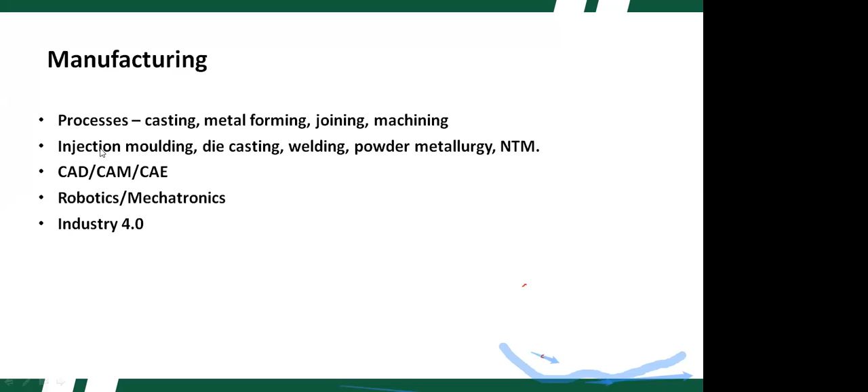Now, Industry 4.0 is the umbrella. It covers all the mentioned terminology. So basically, at the level of Industry 4.0, it is the communication between the elements, such as the robotic arms, through the framework of IoT, that is the Internet of Things. So this is the brief overview of the manufacturing setup, which of course includes the traditional processes and also some of the modern elements.

Okay, now we specifically come to additive manufacturing. We define it. It is popularly called 3D printing, and also a formalized term for rapid prototyping. Rapid prototyping we will be covering later, but as the name suggests, some prototype has to be produced quickly.

Now again, as I have told, at the core lies a 3D CAD system. So first we need to generate a model using a 3D CAD system, and then it can be fabricated. So the parts are made by adding material in layers. This is interesting here, that each layer is a thin cross section of the part derived from the original CAD data. So that also we will discuss, how it will be.

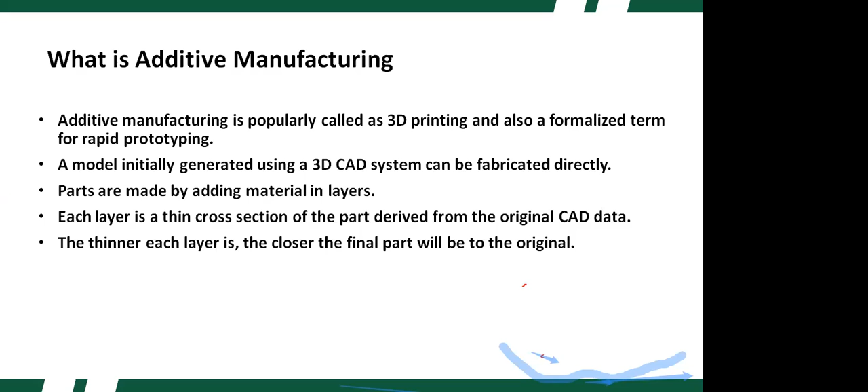The thinner each layer is, the closer the final part will be to the original. So here I would like to present an analogy that the layer by layer manufacturing, or additive manufacturing, in some way is similar to the medical imaging of the CT scan, but it is just the other way around. So that we will cover a little bit in the scanning part.

Okay, so basically the native file format to additive manufacturing is the STL format, the abbreviation of stereolithography. And originally it was created by 3D Systems of the US. Now, as mechanical or automobile engineers, we have been working with CAD. And if you are a little bit familiar with computer graphics, we know that in the back end of a CAD package there are certain algorithms going on, like the line drawing algorithms and so on. Similarly, there are various CAD model formats as well. So STL is just one of them.

So it can be called standard triangle language, or standard tessellation language. And this is a standard file format supported by many software packages used for rapid prototyping, 3D printing, and computer-aided manufacturing also. An STL file basically describes the surface geometry of a 3D object, and it does not take into account the representation of color, texture, or other common CAD model attributes. So just the surface geometry. And we can use ASCII and binary representations. Binary files are more common because these are more compact files.

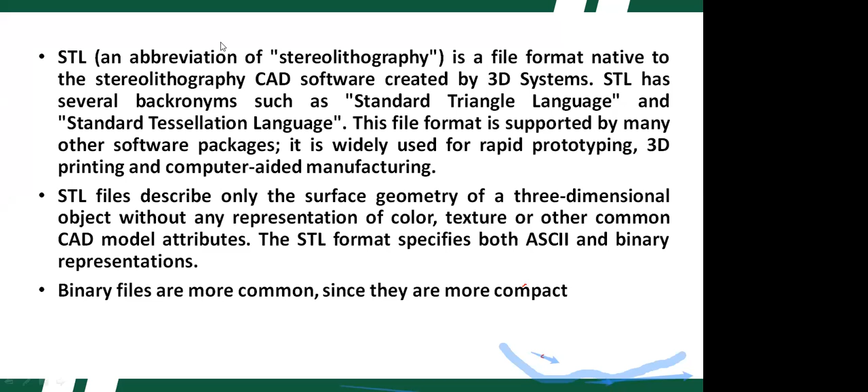So this is a typical representation where we have the original CAD model. As I have told you, for better understanding of the CAD model, one needs to have a knowledge of computer graphics, how the graphics entities are created with the help of computer graphics. So there are various algorithms and various procedures, and the STL model is basically created from this CAD model of this cylinder by using these triangulation elements.

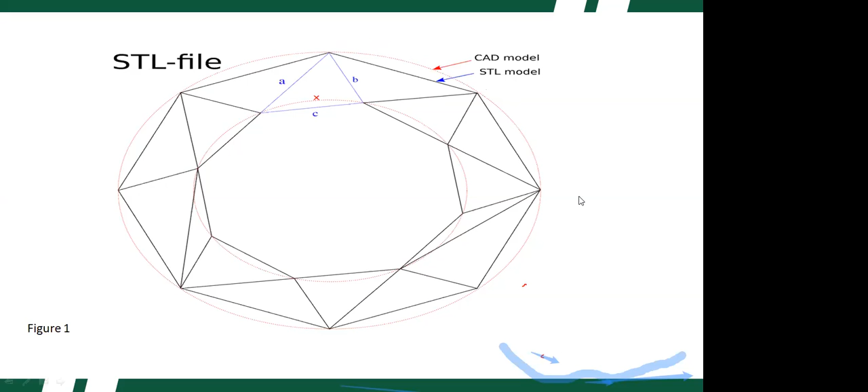Okay, and one more thing. Of course, when we talk about additive manufacturing as such, the better knowledge of this subject is with the industry people who have been supplying the equipment and working on various projects. So as an academician, I'm largely following a textbook style, so that the faculty members and the students have a better idea or overview. Then of course, when they start doing the actual work in collaboration with the industry, they can go further, more technical.

For example, there are various issues. In the polymer domain, there are various machines. Some machines cost maybe just rupees 1 lakh to 3 lakh, like, for example, MakerBot in the range of 2 to 3 lakh, but there are Stratasys machines maybe costing rupees 30 lakhs. So the faculty member might have some funded project where the money is available. But still the question is what kind of equipment you will require. That you can answer only when you have at least a good academic exposure to the subject.

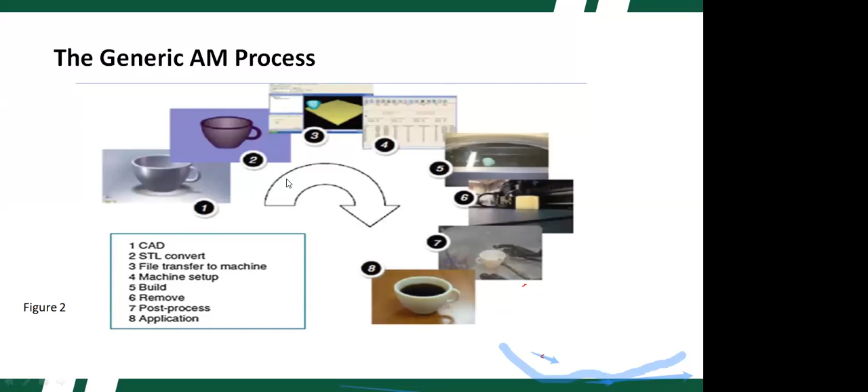Okay, so we will commonly encounter certain processes like stereolithography. So this is an old process, again used to create certain 3D models by specific machinery, originated by US company 3D Systems. They use the term stereolithography. Then the 3D printing term was actually used by the researchers at MIT. So they invented an inkjet printing based technology.

Because if we talk about our normal inkjet or laser printers, they are basically doing the same thing in a 2D domain. So we have a piece of paper which is a plane, and there is a reservoir of the liquid ink or the powder, whatever it is, and it is coming in the required quantity, and the print head basically moves onto the paper. So the only thing is that in 3D printing, we are extending a 2D process into the third dimension.

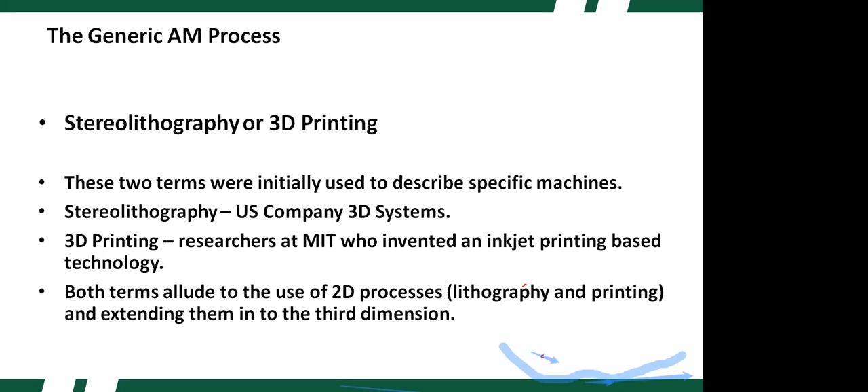Okay, so here at this stage, it is important to give a distinction between additive manufacturing and CNC machining, because as I have told earlier, in both processes there is basically some point system, maybe either a cutting tool or the extruder of the machine, moving in XYZ coordinates. So additive manufacturing shares some of its DNA with CNC machining, but of course CNC is primarily a subtractive process rather than an additive process. So the primary material is just a block of material, at least as big as the part that has to be made.

And the additive manufacturing technology was originally developed around polymeric materials, waxes, paper laminates. Then of course composites, metals and ceramics have been introduced, and nowadays of course biomaterials as well, and possibly the printing of some organs also, but that will take time.

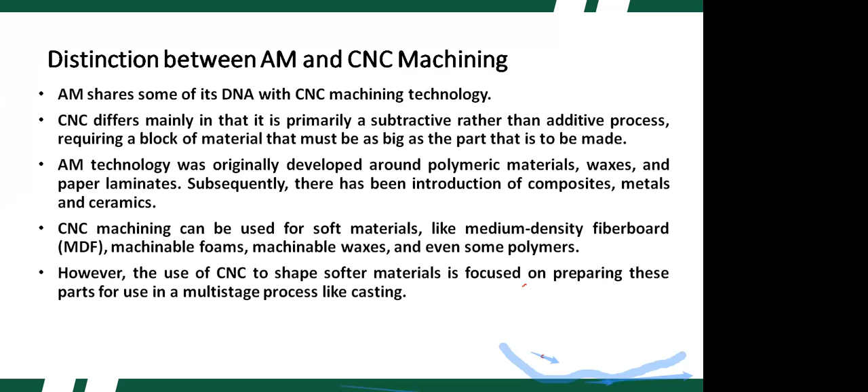Now CNC machining of course can also be used for some soft materials like medium density fiberboard, some machinable foam, machinable waxes, some polymers. But these materials are not the primary materials for CNC purposes. They can later be used as patterns. So CNC is primarily for machining blocks of material like steels. So it works particularly well for hard brittle materials like steel and other metal alloys to produce high accuracy parts with well-defined properties. So these will be the final products.

High-speed CNC machining can remove material much faster than additive manufacturing can add material in the same amount of time. But there are other considerations. For example, additive manufacturing can produce the part in a single stage, but CNC machines require considerable setup time and process planning, particularly as parts become more complex in geometry.

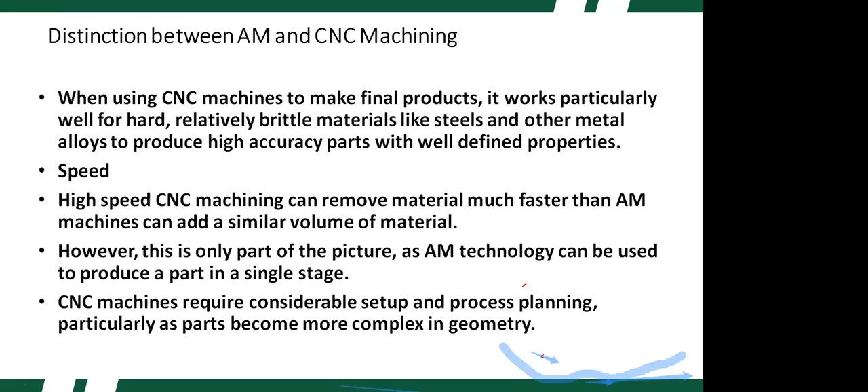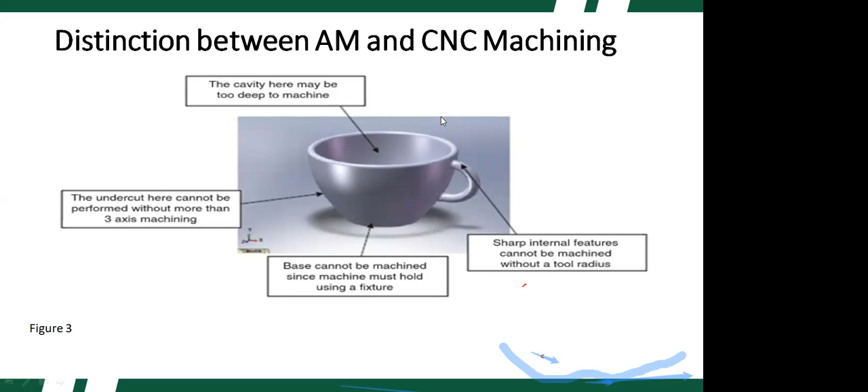Okay, so this is just a simple example: if we want to manufacture this cup using CNC machining, we need maybe this size of block, then this deep cavity has to be machined. This undercut will be difficult and we will require more than 3 axes of machining here. Then we need to hold the component in a specific fixture to machine the base. Then for these sharp internal features, we need a specific tool radius. So there are technical issues. So under certain circumstances, we need to make use of additive manufacturing.

Okay. Again, as I have been discussing, conventional manufacturing processes are still very much in use, and it doesn't happen that if any new technology is there, it is just taken up by the industry. It normally doesn't happen that quickly. So whenever a new technology is introduced, we need to show the benefits of that technology. Then there are cost issues as well.

So it has been described as revolutionizing product development and manufacturing. That is definitely there, that with the integration of CAD into additive manufacturing, product development is quite a bit different as compared with conventional techniques. For example, in die casting, the mold cavity, the die, once it is machined, it is machined. But in additive manufacturing, there is still scope for repetitive product development and manufacturing, so if at stage 1 or prototype 1 we don't like certain things, we can do it again, but for die casting or injection molding, it is tricky.

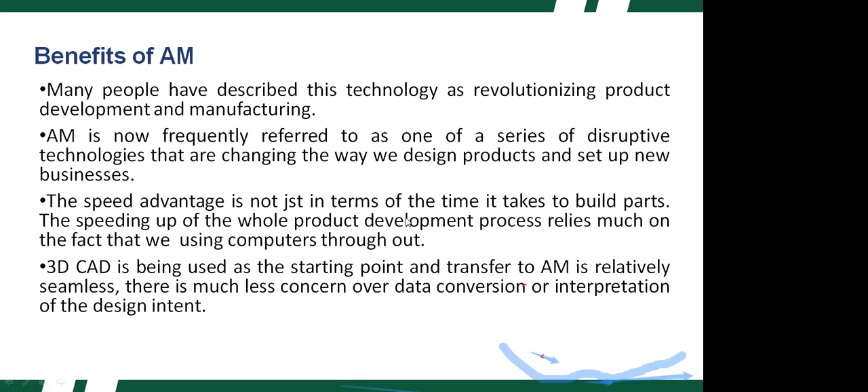Just a moment, just a moment. Sorry,

I want to discuss now some of the example additive manufacturing parts. There are just so many nowadays. So this one is the fuselage. It was fabricated using a stereolithography machine; the component is for an unmanned aerial vehicle, and here the skin is reinforced with a conformal lattice structure. So this one, the lattice structure.

And B and C were fabricated using the material jetting process. In B we see basically two materials. In B, it is the deposition of multiple materials simultaneously. One set of nozzles deposited the clear material, the other set deposited the black material, and C is a chain section. So that is also the advantage of additive manufacturing, that interlinked components or assemblies can be manufactured.

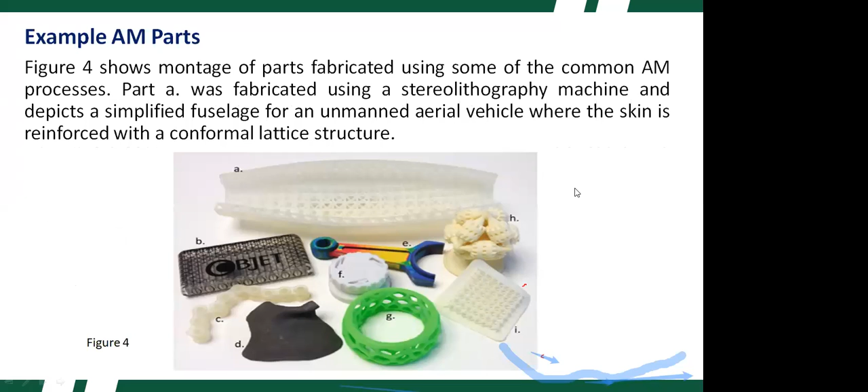Then F and G, material extrusion. These are the material extrusion process, simply melting the polymer and forcing it through the extrusion head. And H and I, polymer powder bed fusion. As the process name tells, we don't extrude the polymer through the extruder head. It is just fusion on the bed with the application of external heat. So these are just typical parts, but of course nowadays there is a big range.

Okay, so if we want to talk about the term additive manufacturing, why we use this term: basically it is combining materials layer by layer, and the term additive manufacturing seems to describe this quite well. But of course there are other terminologies. Maybe we can discuss a couple of these.

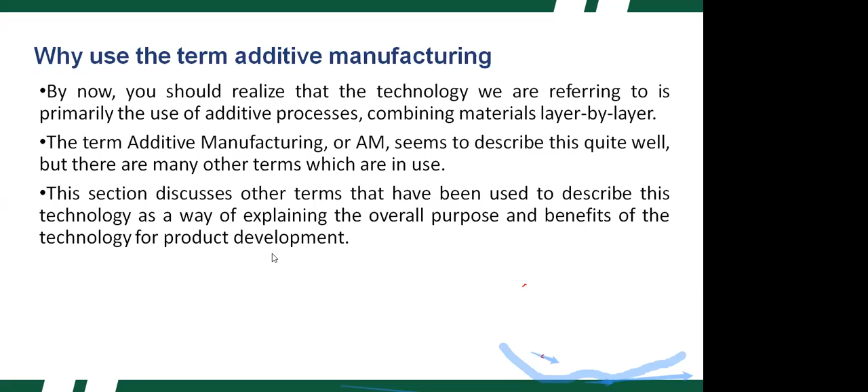So additive manufacturing or layer-based manufacturing. These descriptions relate to the way the processes fabricate parts by adding material in layers. This is in contrast to machining technology that removes or subtracts material from a block of raw material. Also, some of the processes may not be purely additive. They may add material at some point, but there might be subtractive processes at some stage.

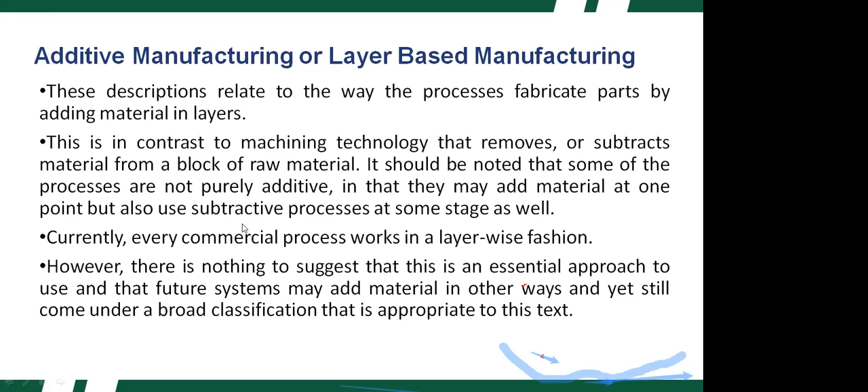And of course, every commercial process works in a layer-wise fashion itself. Even conventional manufacturing processes can be layer-wise, but it is not essential that it has to be layer-wise. The materials may be added in different ways, but in a broad classification it may be called a layer-wise method. Material may be vaporized onto some substrate.

Okay, stereolithography or 3D printing. Basically both are identical processes. The only thing is, these were developed by different companies.

For example, 3D Systems is a US company. They created the terminology of stereolithography. So basically lithography is just the ancient stone writing. And the 3D printing terminology was used by researchers at Massachusetts. They invented the inkjet printing based technology.

Again, as I have discussed, lithography or printing are essentially 2D processes, and we need to just extend them into the third dimension. Because we are familiar with printing technology as such, the idea of printing a physical 3D object should make sense.

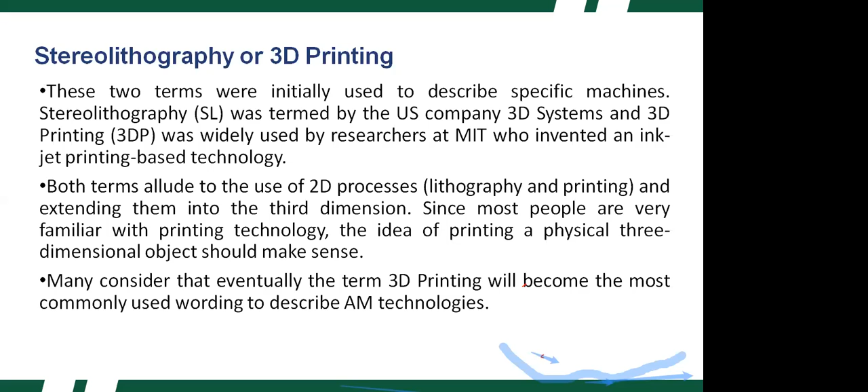Many consider that eventually the term 3D printing will become the most commonly used wording to describe additive manufacturing technology. Additive manufacturing, as we have described it, is the layer by layer deposition of materials. But if we talk about the equipment, it is the extension of 2D printing into a third dimension. So 3D printing is a convenient term to describe additive manufacturing technologies, and the additive manufacturing domain can be a broader domain.

Rapid prototyping. Whenever we take up a course in manufacturing, we encounter the term rapid prototyping, also in CAD and CAM subjects. So why was it called rapid prototyping? Because of the process this technology was designed to enhance or replace. Manufacturers and product developers used to find prototyping a complex, tedious, and expensive process that often impeded the developmental and creative phases during the introduction of a new product.

Now, suppose we have to create some new product, and it is geometrically complicated with intricate shapes. Then it cannot be simply created by a lathe or milling machine, and sometimes not by CNC either. There might be dependency on other processes, maybe die casting or even non-traditional processes, but it will be complicated and time consuming. Rapid prototyping was found to significantly speed up this process, and therefore this term was adopted.

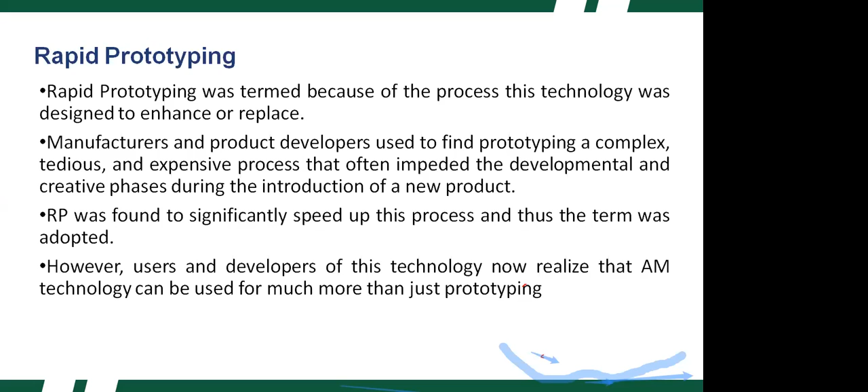Originally additive manufacturing or 3D printing was developed largely for rapid prototyping work, but now it is much more than just prototyping. There have been improvements in accuracy and material properties, and this technology has catapulted into testing, tooling, manufacturing, and other realms outside the prototyping definition. Earlier, the concept of prototyping was largely about how the product will look.

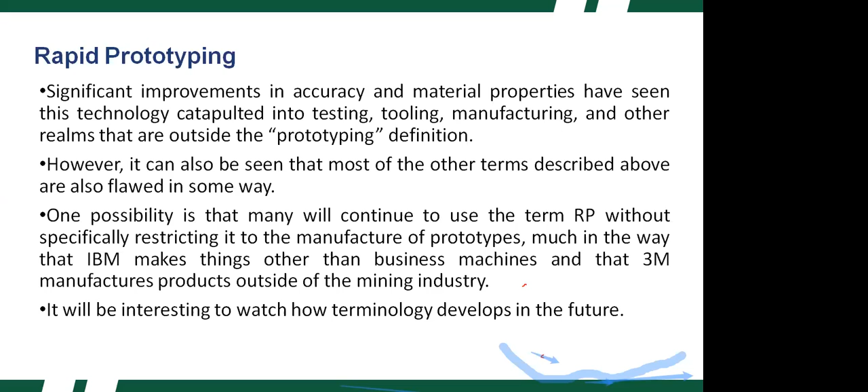Of course, the term rapid prototyping will also continue to be used without restricting it to the manufacturing of prototypes, just as a terminology. For example, IBM might have been referred to all the time for just PCs, and 3M manufactures products outside of the mining industry. So just as a word, additive manufacturing will be referred to all the time as prototyping.

Okay, so we have already discussed that we basically convert the file into an STL file, which is originally built within a conventional

Just a moment. Sorry, some disturbance at my home. Yeah.

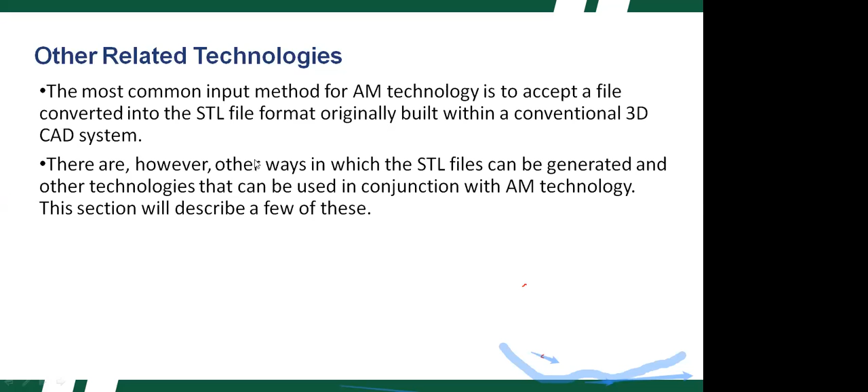Okay, so there are other ways in which STL files can be generated, and other technologies that can be used in conjunction with AM technology. We can quickly discuss reverse engineering. As I have been discussing, in additive manufacturing the material is deposited layer by layer in terms of X, Y, Z coordinates. Similarly, imaging does the same thing. We capture geometric data from another object; that is the imaging or scanning part.

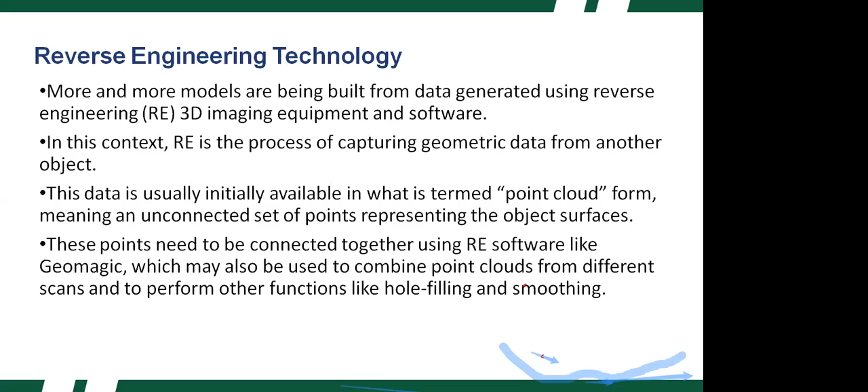It is basically in point cloud form; that is the technical term used for the data. It is an unconnected set of points representing the object surfaces. The interesting analogy is that in additive manufacturing we need to disconnect the CAD model, and in imaging we need to connect the points. These points can be connected using reverse engineering software like Geomagic, which can combine point clouds from different scans and perform other functions like hole filling and smoothing.

Then the actual method might be laser scanning or some touch probe, for example, the coordinate measuring machine, CMM. So it is a touch probe. Here the object is put onto the machine table, and a probe touches the various areas of the object, and finally we can have the dimensions or the 3D CAD model, something like that.

Objects that have complex internal features or anatomical models may make use of computerized tomography. As I told you earlier, the CT scan was initially developed for medical imaging, but it is also available for scanning industrially produced objects. As I have mentioned previously, this technique essentially works in a similar way to additive manufacturing by scanning layer by layer and using software to join these layers and identify the surface boundaries.

In additive manufacturing, it is just the opposite: we have a CAD model. We basically slice the CAD model, and the finer the slicing is, the finer is the product.

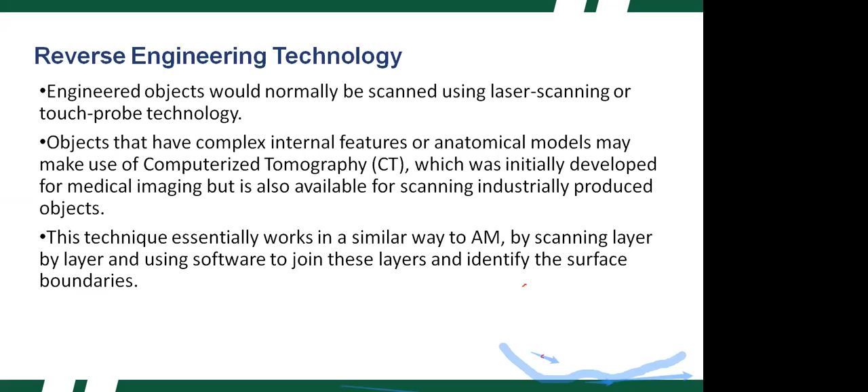Computer-aided engineering. For product design and development, we use 3D CAD. We all know it is an extremely valuable resource. One major benefit of software-based design is the ability to implement change easily and cheaply. If we are able to keep the design primarily in a software format for a larger proportion of the product development cycle, we can ensure that any design changes are performed virtually on the software description rather than physically on the product itself.

For example, we have a CAD model which is initially in a CAD workstation. From there it goes to the manufacturing station, or the CAM. Before starting the actual CNC program, we still have the scope to change it there. And 3D CAD is commonly linked to other software packages: FEM, the analysis part, to calculate the mechanical properties of a design, CFD, electromagnetic analysis, structural, thermal, and so on.

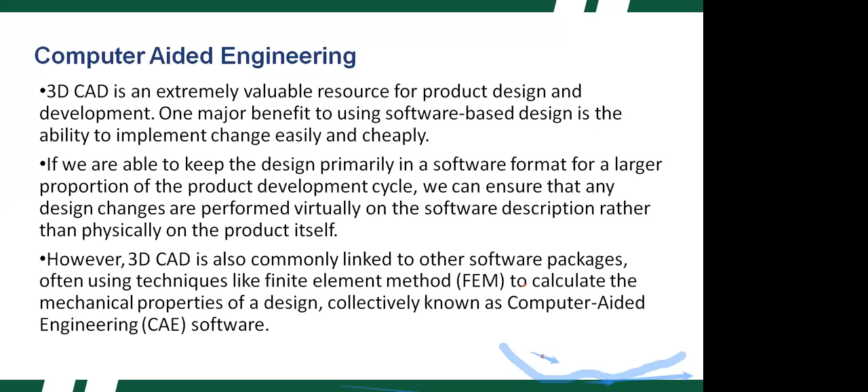Now we come to the machine control part. A CNC is a mechatronic system. If you have studied mechatronics, we know that at the core we have some conventional mechanical component, which can be just an IC engine. Then we have the actuators and sensors connected to the mechanical component, and then the microcontroller-based control. In a CNC machine, we have DC motors or servo systems in use, the microcontroller is there, and we require precise positioning of the cutting tool.

In the same way, additive manufacturing technology also requires precise positioning of equipment, similar to a CNC machining center or even a high-end photocopy machine or laser printer. Interestingly, a desktop laser printer at our home or office is a very fine example of a mechatronic system. There are several motors along with their controllers doing their task very nicely, and of course there are sensors as well. The photocopier is a much more complicated mechatronic system.

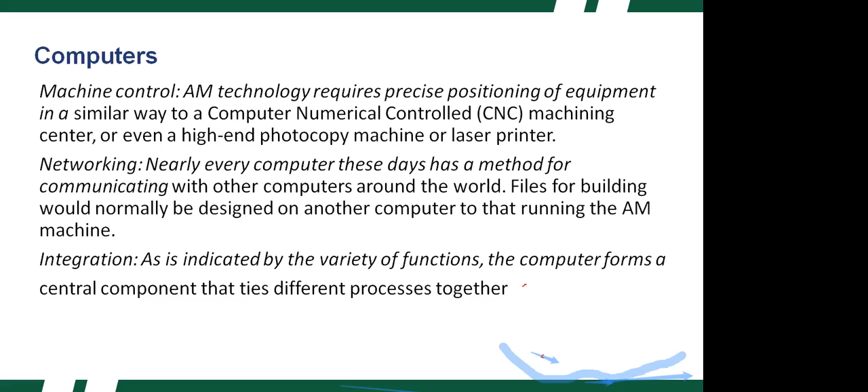Integration. As indicated by the variety of functions, the computer forms a central component that ties different processes together. As I was discussing a typical mechatronic system, here the process controller is a microcontroller. I hope people have a basic familiarity with the microcontroller, because it is now an integral part of many systems. It is basically the IC chip. It is called a microprocessor if the memory elements and ports are not on board. But if the memory elements and ports are on board, as a standalone device, it is a microcontroller. It is the heart of PLCs, the microwave, washing machine, elevator, mobile phone, and many other devices or gadgets.

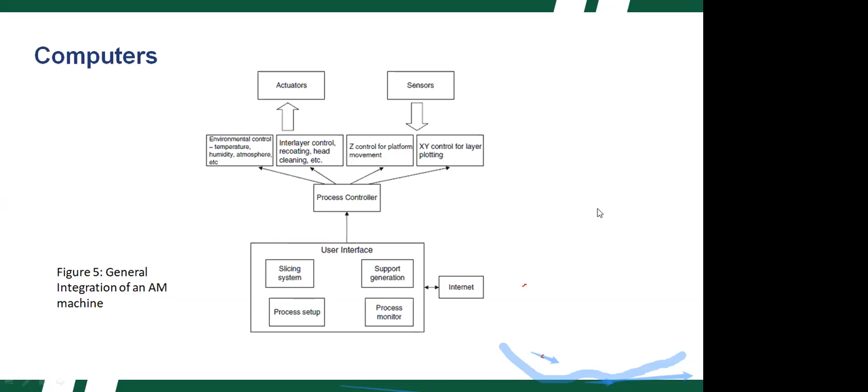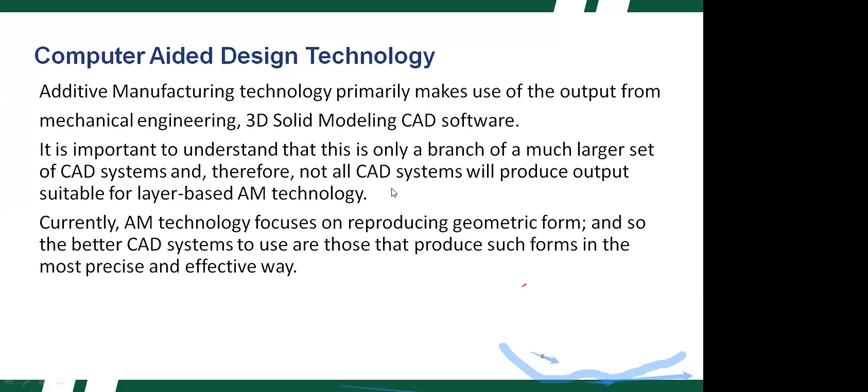Okay, so CAD has developed quickly because of the demand set by CAM, computer aided manufacturing, and because it is a channel for converting the virtual images developed in CAD into the physical products that we use in our lives. So basically the driving factor for the development of CAD has been the conversion of the images to physical realities.

And of course, the development has been fueled by development in associated technologies like processor, memory, and display technologies. A few years back, it was almost impossible to run packages like ANSYS or even MATLAB on a PC, and even further back AutoCAD also. So there were dedicated graphic stations, but nowadays on a PC we can run the heavier packages.

So CAM systems produce the code for numerically controlled machinery, essentially combining coordinate data with commands to select and actuate the cutting tool. This part we have also discussed. So basically, as in conventional manufacturing the CAM and CAD integration is seamless, similarly in additive manufacturing, the CAD and additive manufacturing integration is seamless.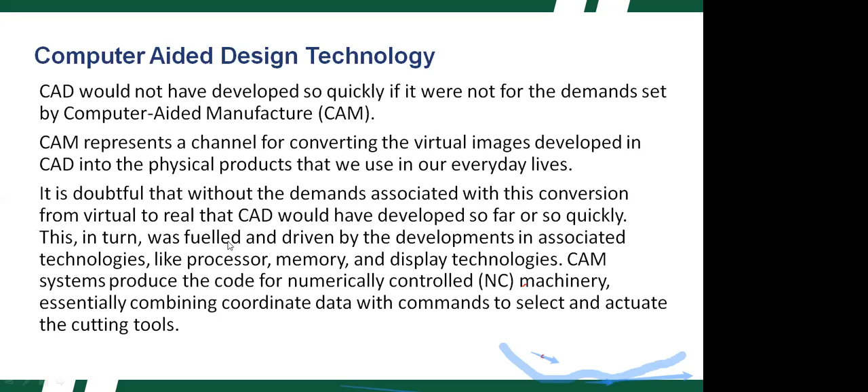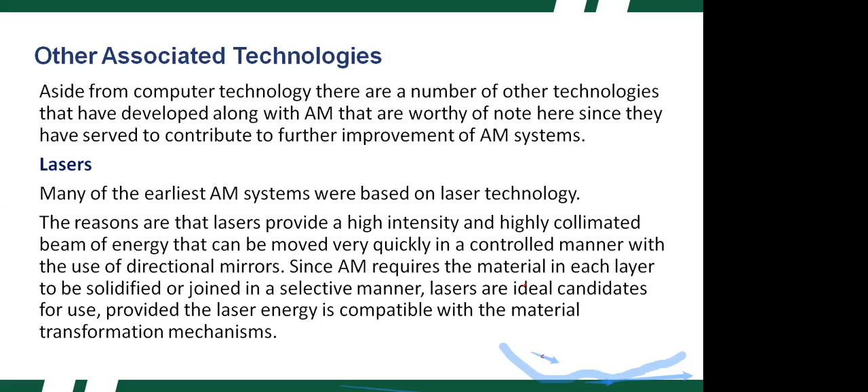Okay, so other technologies have developed along with additive manufacturing, for example, lasers. Many of the earliest additive manufacturing systems were based on laser technology. Lasers provide a high intensity, highly collimated beam of energy that can be moved very quickly in a controlled manner with directional mirrors. Since additive manufacturing requires the material in each layer to be solidified or joined selectively, lasers are ideal candidates, provided the laser energy is compatible with the material transformation mechanisms, meaning it should not destroy the required microstructure or desired properties of the product.

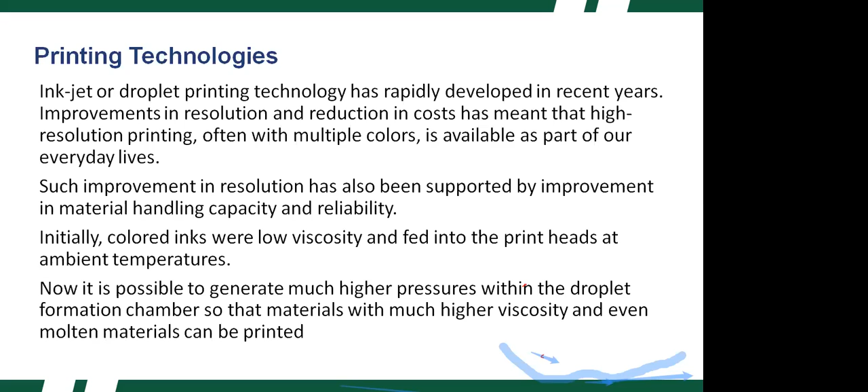Printing technologies. Inkjet or droplet printing technology has rapidly developed in recent years, with improvements in resolution, reduction in cost, high resolution printing, and multiple colors now available. This has been supported by improvement in material handling capacity and reliability. Initially, colored inks were low viscosity, fed into print heads at ambient temperatures. Now it is possible to generate much higher pressures within the droplet formation chamber, so that materials with much higher viscosity and even molten materials can be printed.

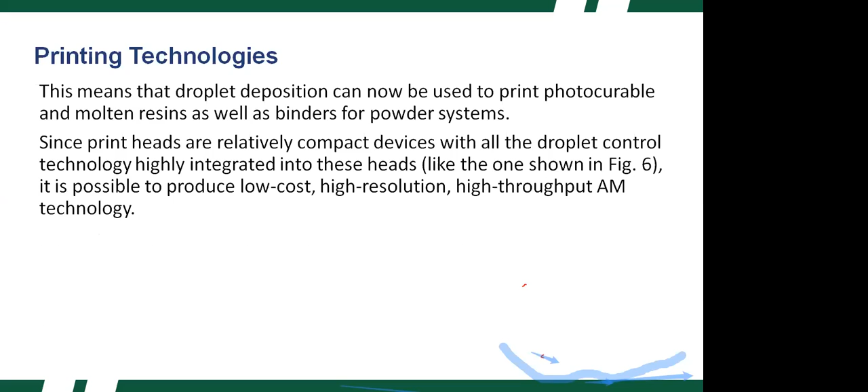Now droplet deposition can be used to print photocurable and molten resins as well as binders for powder systems. Photocurable simply means polymers which can be cured with the help of light. Since print heads are relatively compact devices with all the droplet control technology highly integrated, it is possible to produce low cost, high resolution, high throughput additive manufacturing technology.

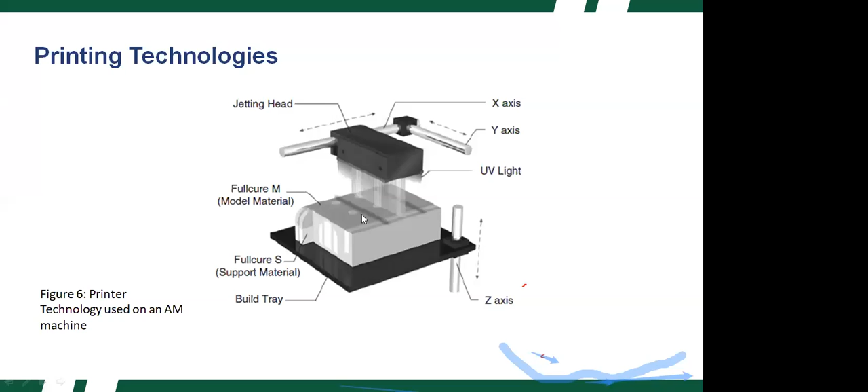PLCs, I think you might have heard this word at some stage, maybe during BTech or later on. So basically, the input CAD models for additive manufacturing are large data files generated using standard computer technology. Once they are on the additive manufacturing machine, these files are reduced to a series of process stages that require sensor input and signaling of actuators.

This is process and machine control that often is best carried out using microcontroller systems rather than microprocessors, although both are similar, but as I have told, a microcontroller is a standalone device for process control. Industrial microcontroller systems are the basis of PLCs, or programmable logic controllers, which are used to reliably control industrial processes.

Designing and building industrial machinery like additive manufacturing machines is much easier using building blocks based around modern PLCs for coordinating and controlling the various steps in the machine process.

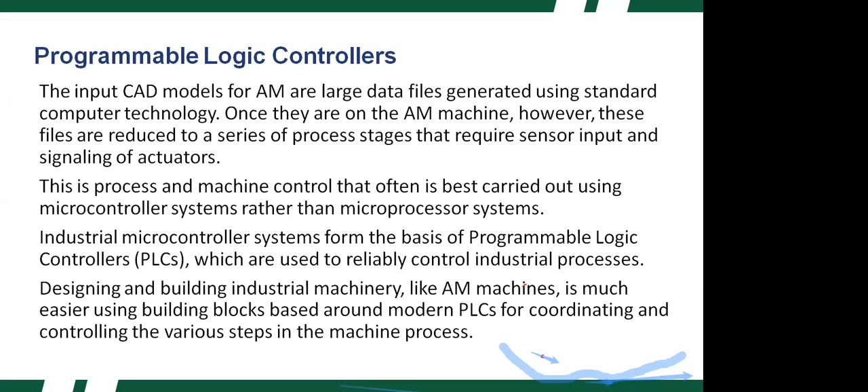Okay, so the early materials. Earlier additive manufacturing technologies were built around materials that were already available and that had been developed to suit other processes. However, the additive manufacturing processes are somewhat unique, and these original materials were far from ideal for these new applications. For example, the earlier polymers were hard, but some softer material or combination of hard and soft was required. For example, the early photocurable resins resulted in models that were brittle and warped easily.

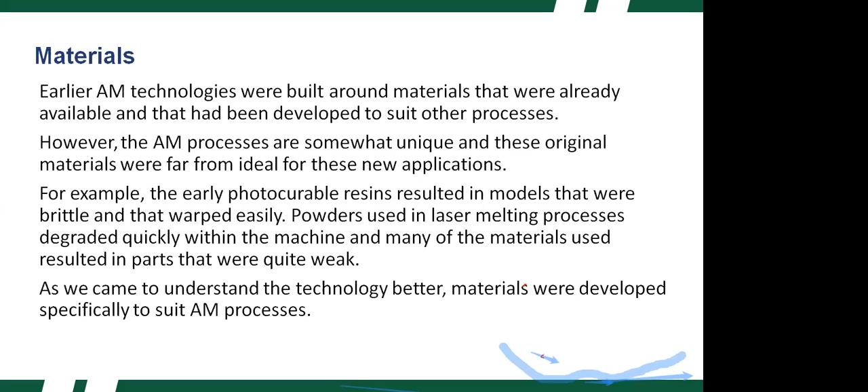Powders used in laser melting processes degraded quickly within the machine, and many of the materials used resulted in parts that were quite weak. So as we came to understand the technology better, materials were developed specifically to suit the additive manufacturing processes. Okay, so this is the more technical part: how do we classify the additive manufacturing processes.

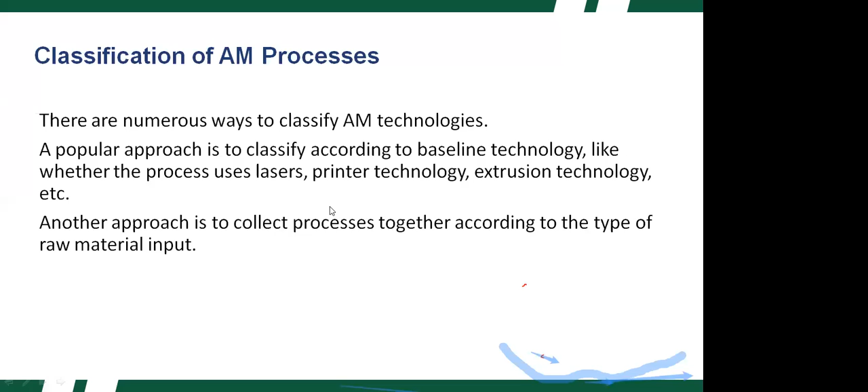There are numerous ways to classify. The popular approach is to classify according to baseline technology, like whether the process uses lasers, printer technology, extrusion technology, etc. Another way is to collect processes together according to the type of raw material input. Okay, so there is a classification method described by Pham. It is a 2D classification method.

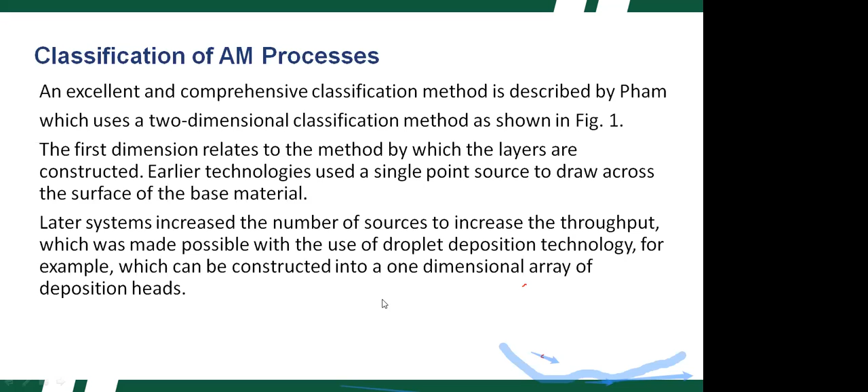The first dimension relates to the method by which layers are constructed. Earlier technologies used a single point source to draw across the surface of the base material. Later systems increased the number of sources to increase the throughput, which was made possible with the use of droplet deposition technology, for example, which can be constructed into a 1D array of deposition heads.

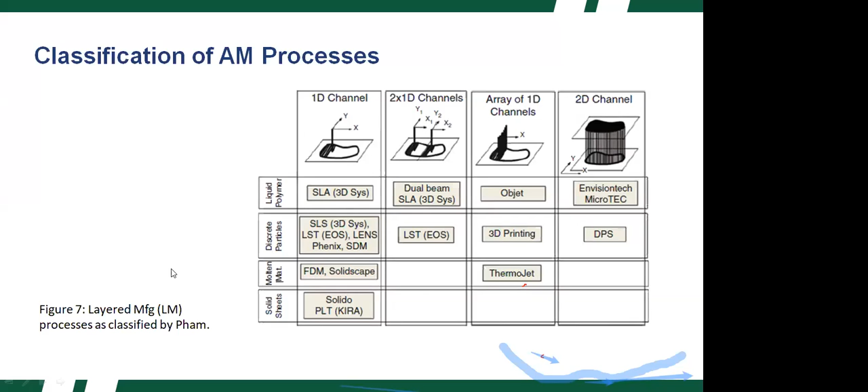Then there are some industry names. SLS is selective laser sintering, fused deposition modeling, like that. So there is a wide range. Further throughput improvements are possible with the use of 2D array technology. For example, digital micromirror devices, high resolution displays, capable of exposing an entire surface in a single pass.

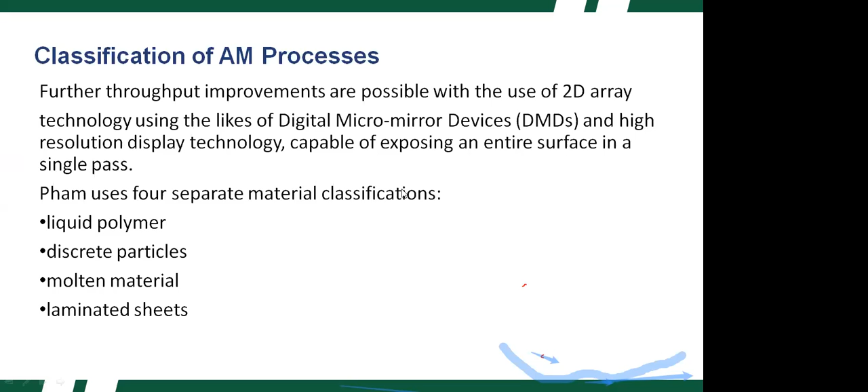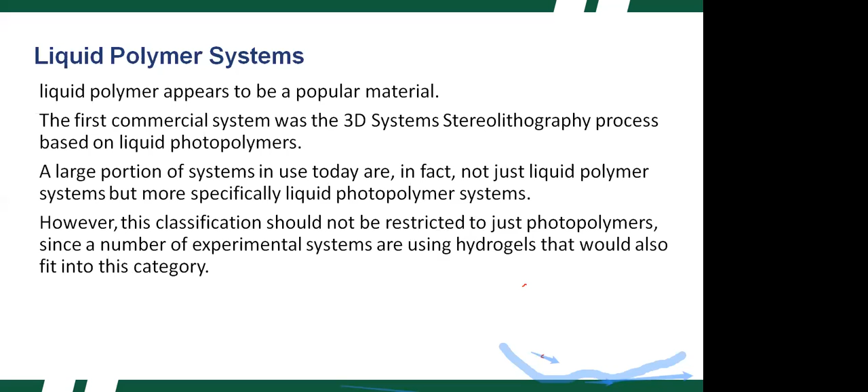And the material classifications are something like: liquid polymer, discrete particle, molten material, laminated sheet. Liquid polymer, so these are the popular materials. The first commercial system was the 3D Systems stereolithography process based on liquid photopolymer. Photopolymer is just a polymer that takes shape with the help of light. Nowadays also a large portion of systems are liquid photopolymer systems. But we cannot restrict the classification to only photopolymers, because there are experimental systems that are using hydrogels.

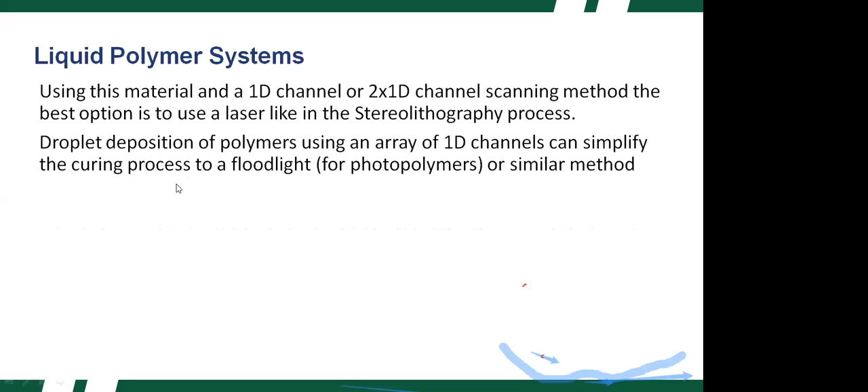So we can use a 1D channel, 2 x 1D channel, and we can use the laser also. Then droplet deposition of polymers can also be used. It can simplify the curing process. Discrete particle systems, so basically powders, that are generally graded into a relatively uniform size and shape and a narrow distribution. Distribution is basically what range of shapes and sizes we have. The finer the particles, the better, but there will be problems if dimensions get too small, in terms of controlling the distribution and dispersion.

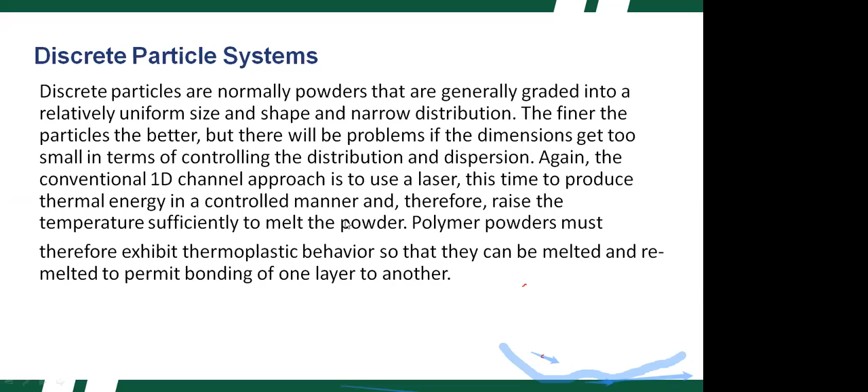The conventional 1D channel approach is to use a laser to produce thermal energy in a controlled manner and therefore raise the temperature sufficiently to melt the powder. Polymer powders must therefore exhibit thermoplastic behavior so that they can be melted and remelted to permit bonding of one layer to another. So for discrete particle systems, we have the very popular selective laser sintering technology, again marketed by 3D Systems. Then a specific brand name, EOSINT, developed by the German company EOS.

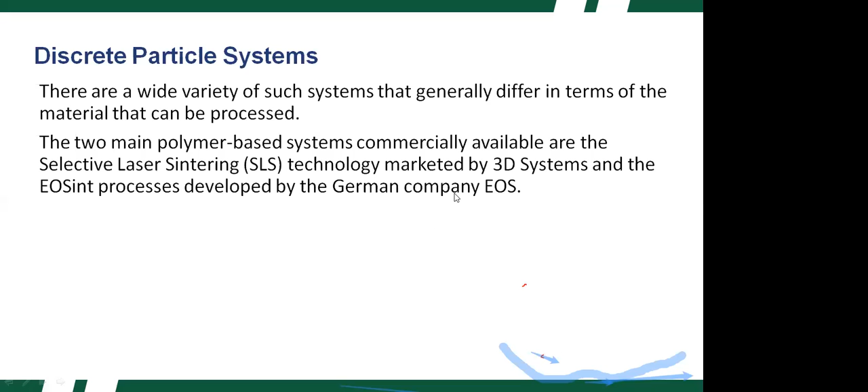Molten material systems: we have a preheating chamber that raises the material temperature to melting point so it can flow through a delivery system. A popular method is FDM, fused deposition modeling, developed by the US company Stratasys. Stratasys is a leader in this domain. It uses an extrusion technique to deliver the material through a nozzle in a controlled manner. Two extrusion heads are used so that the support structure can be fabricated from a different material to facilitate part cleanup and removal.

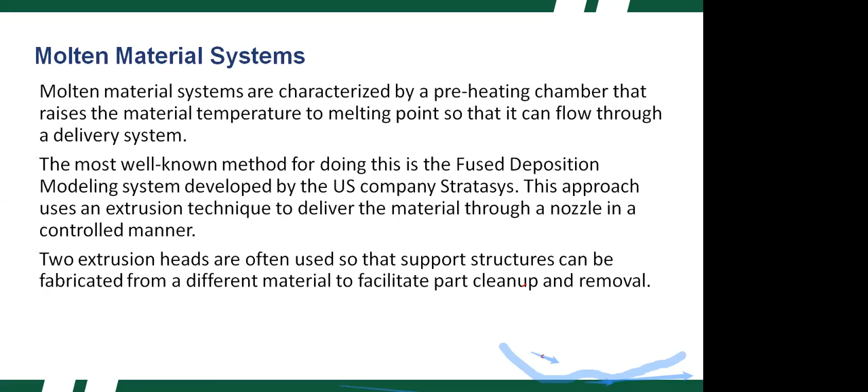Solid sheet systems are also there. Laminated object manufacturing: sheet paper is supplied from a continuous roll and a laser cuts profiles. These form the layers, and then a heat activated resin bonds the layers together. So all the layers are bonded together. It looks like a wooden block, and then excess material can be cut away.

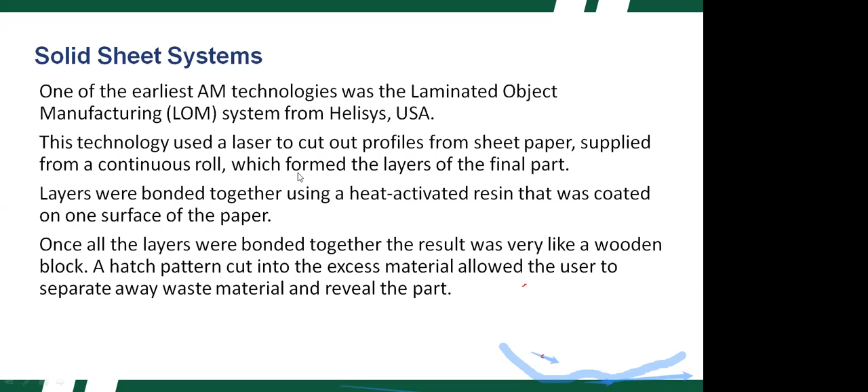Quickly, the metal systems. So now there are direct metal processes. There are some specific branded machines, EOSint-M and laser engineered net shaping. These have been around. Recent additions from other companies, improvements in laser technology, machine accuracy, speed, and cost have opened up this market, but still the metal additive manufacturing systems are quite expensive.

So most direct metal systems work using a point-wise method. Nearly all of them utilize metal powders as an input, because metal powders are easy to obtain, easy to manufacture, and of course easy to work with on a metal additive manufacturing system as compared with maybe a solid block or other thing.

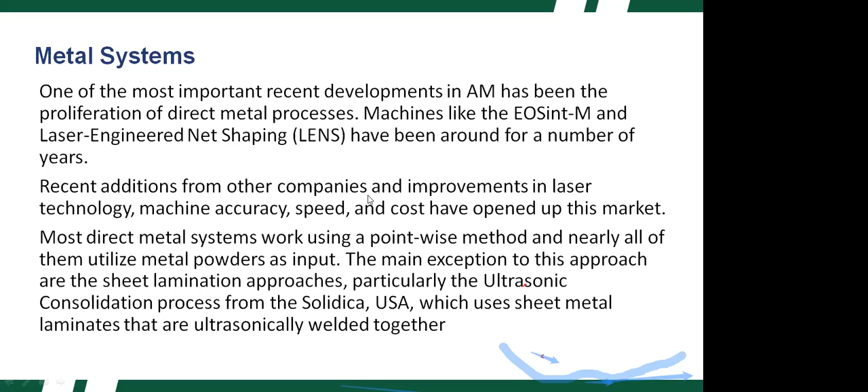Of course there are sheet lamination approaches I have discussed already, and some specific companies have introduced some very novel methods, like Solidica of USA, who introduced ultrasonic consolidation on sheet lamination processes. The previous sheet lamination I discussed was largely polymer sheets, but now we are talking about sheet metal laminates that are ultrasonically welded together. So this is a very innovative thing. Okay, I have discussed this already.

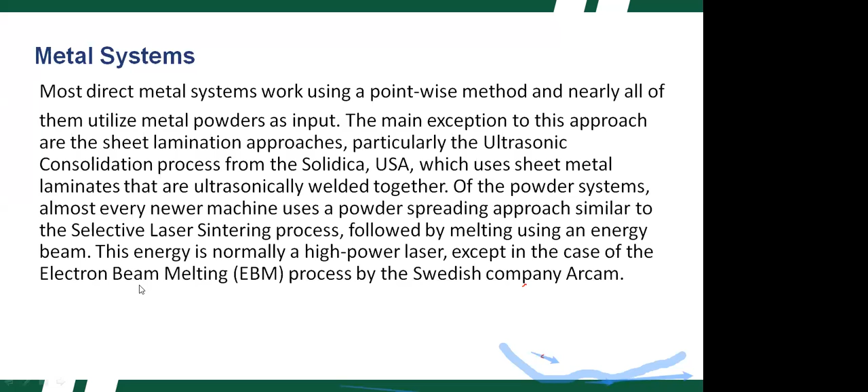Of the powder systems, almost every newer machine uses a powder spreading approach similar to selective laser sintering, followed by melting using an energy beam. The energy is normally a high power laser beam. And of course, some companies have introduced their specific methods, like the Swedish company that introduced electron beam melting. Hybrid systems I will not discuss in the interest of time here.